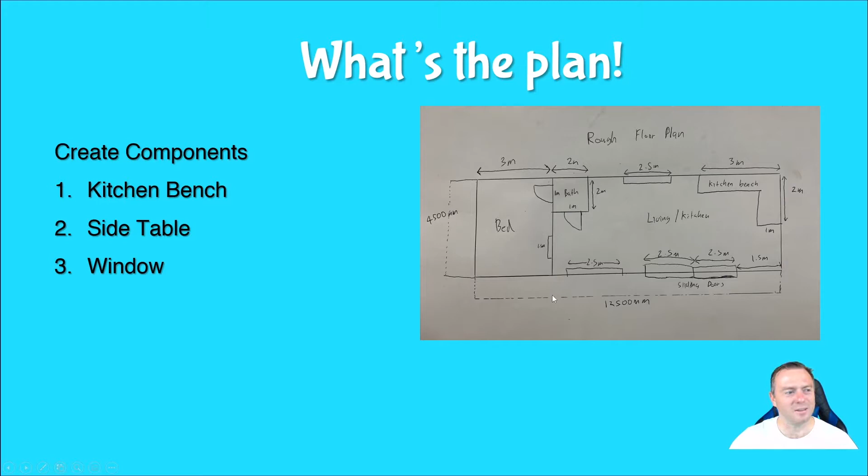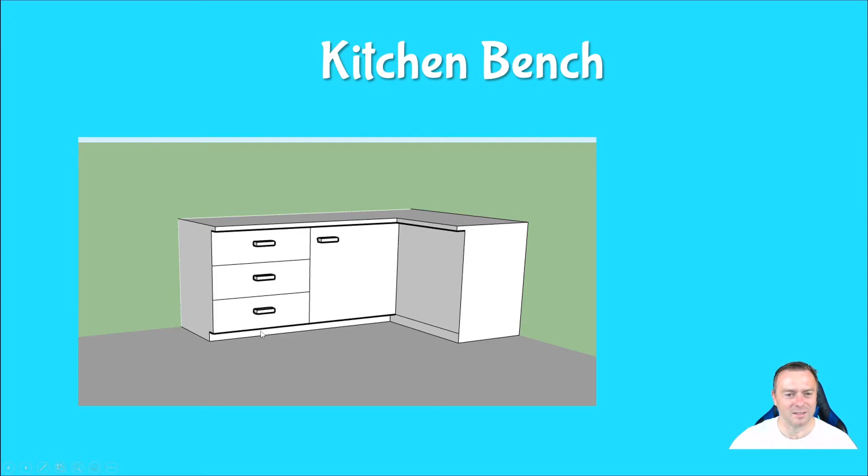Lastly, we have our side table, which should be able to fold in and out off the wall to save space. That will be just a simple rectangle extrusion tool. And lastly, we're going to build a window, a simple mesh window on the side here, using a push-pull trick, and then we're going to put a rectangle into it.

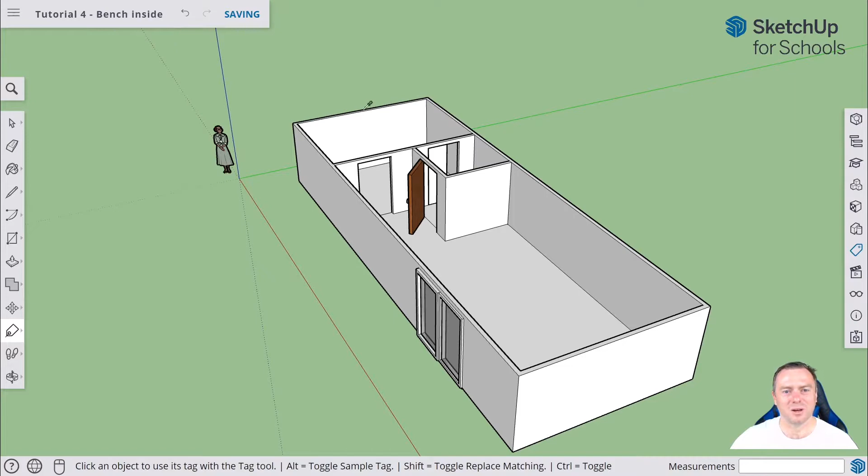So to begin, let's just jump into our SketchUp file. This is what we were up to last time. Notice that I've saved it as I've gone along the way. By clicking save at the top here, it will save it onto our Google Drive. I've just changed the name here up to tutorial number 4 so that you guys can follow along at home if you missed it.

So what we're going to do is zoom in here and build our kitchen bench first, 3 meters by 2 meters. We come here to our rectangle tool, click on that, and come to that very corner there. We come across here and it's meant to be 3 meters, so we're going to go 3,000, comma, and I'm going to make it 800. So that's going to be 3,000 by 800, and then I press enter.

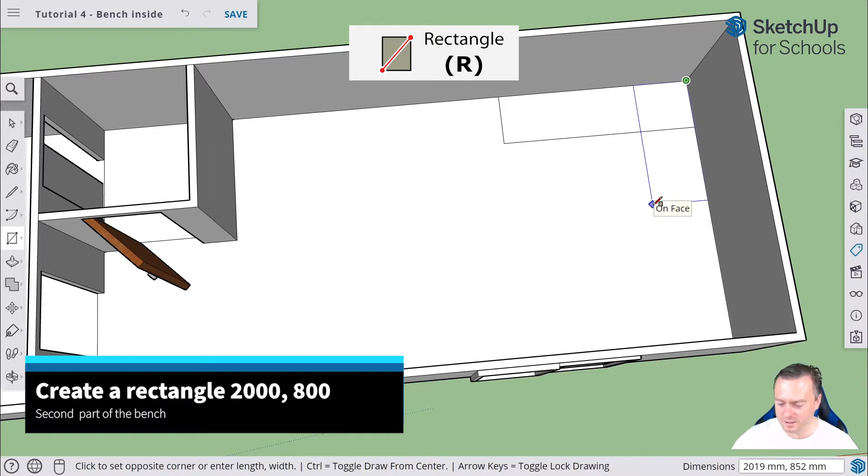I'm going to come across here again, same rectangle tool, but this time I'm going to make it a little bit smaller. So we're going to go 2,000, comma, 800. So now we have our 2 rectangles.

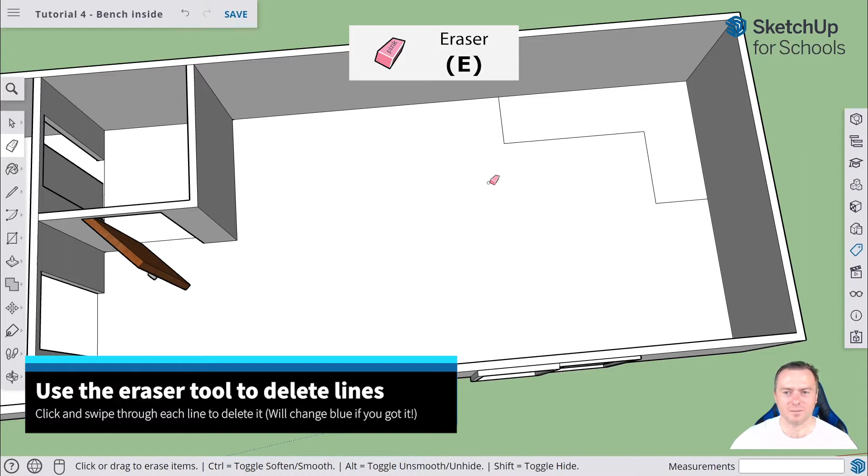Now if we push and pull this up, we'd have to do it 3 separate times, but it's all going to be the same height. So what we're going to do is actually use the eraser tool and get rid of these 2 lines here. The way we do it is we click here, swipe through and see how it's changed to blue, and let go. Then if I swipe down, click through there, it then lets go of that. Pretty cool, so now we have a little L shape for our kitchen in the corner.

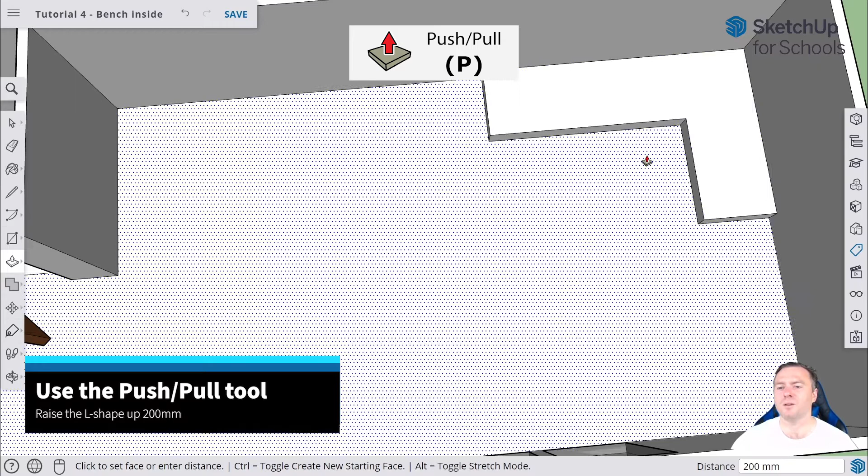We're then going to use the push pull tool. So we come down here, push pull, and bring that up. We're going to have a 10 centimeter gap down the bottom. To do that though, we need to have a top above it, so we're actually going to cheat a little here and go up 200 millimeters, and you'll see why we've done that later.

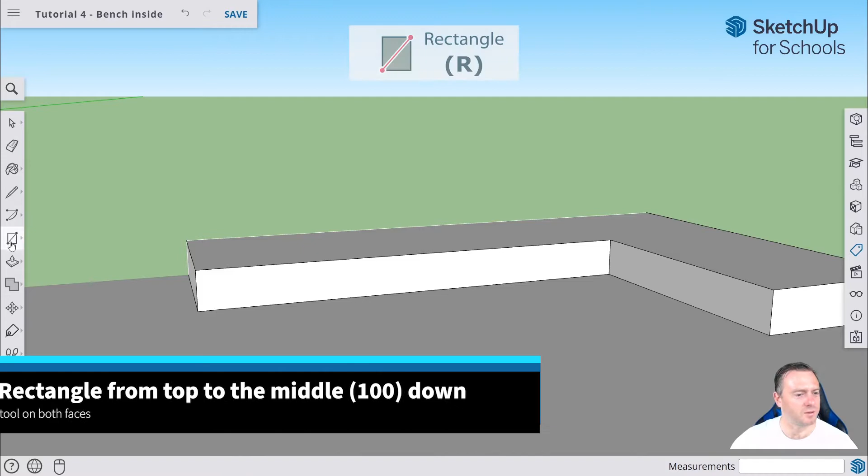So this is going to be a bit tricky with the walls to play around with this. Because we've been awesome and done the tags as we've gone, we can now hide the walls, hide the front door. Pretty cool. So now if we zoom in here using the hand tool, we can now build a little rectangle into this. So we're going to use the rectangle tool, click on the corner here, and what I'm going to do is go down to the midpoint and then straight across.

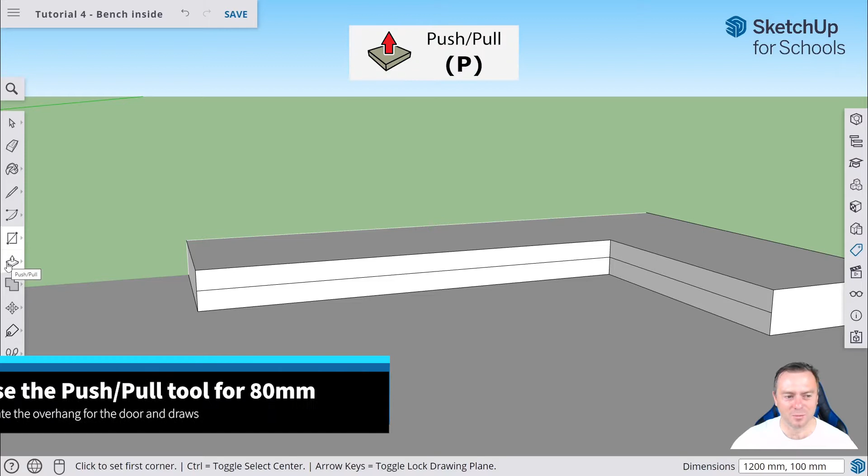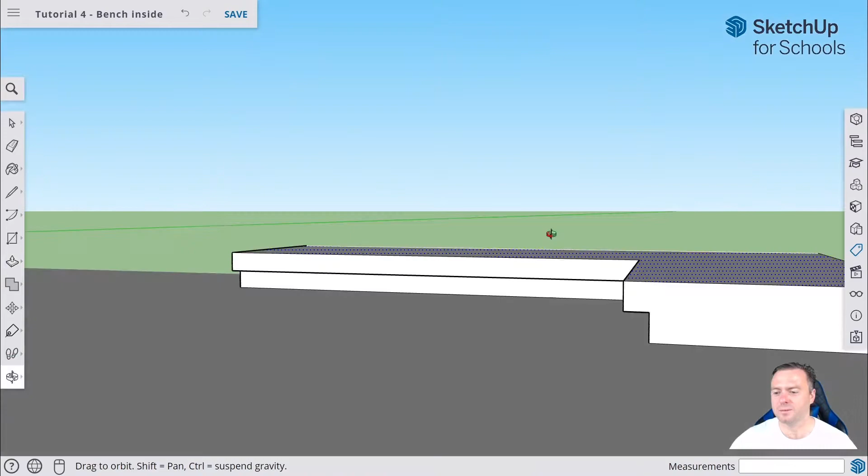And then I'm going to do exactly the same over here. Because it was in the middle between it, we now have the bottom under here. I'm going to make it have a bit of an overhang. So we go to the push pull tool and click on this guy, and let's go across, let's do 8 centimeters, so 80 mil. We've got a bit of overhang there for our benches, the doors and the drawers, and we've got 80 as well on this side. So now we have that little overhang, which looks pretty cool.

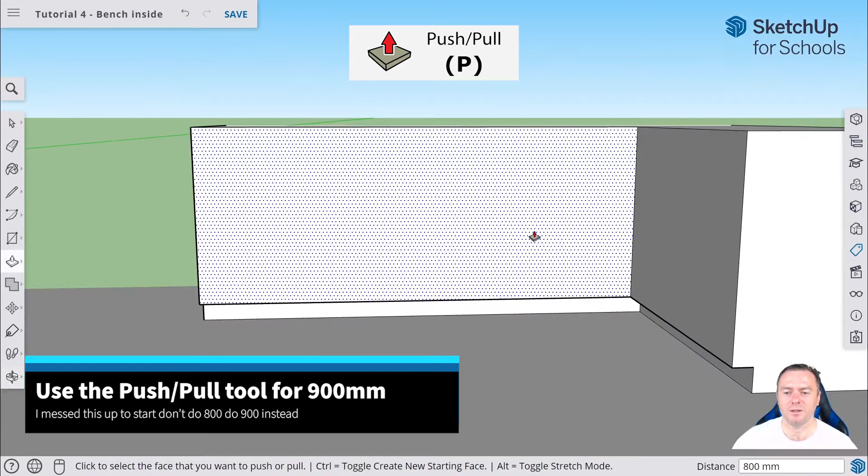We then need to raise this all up. Before we went up, how far did we go? We went up 10, so let's go up another 80. If we click on that and go up, we'll go 800 mil. So we now have our bench with the 10 centimeter there, we've got 800 up here. Actually, let's go up another 90. So undo, let's go up 900 mil instead. Now you'll see why I did that later.

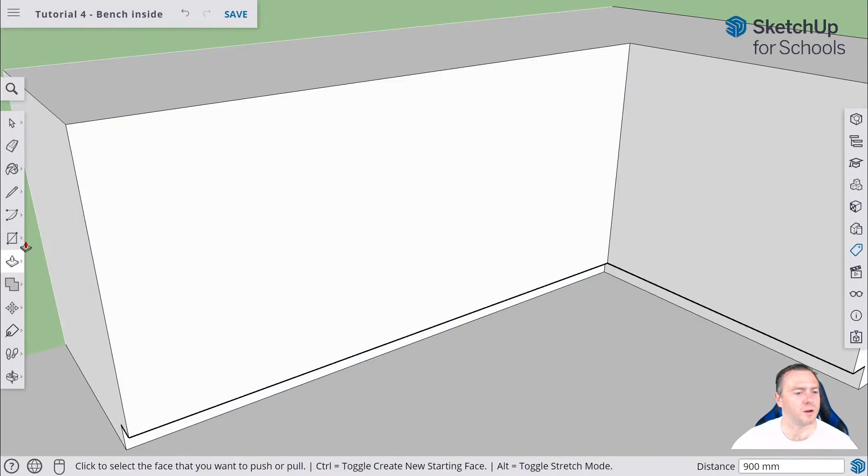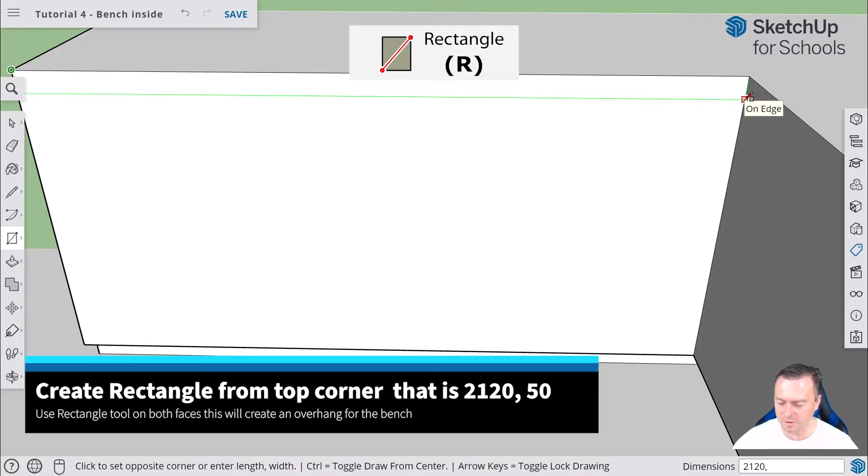So what's going to happen now is we're going to build a rectangle into the side of the door for the overhang here, and we want that to go across to there. So we go 2120, comma, and we want to go down, let's go 50 mil. Okay, and then we'll do the same over here.

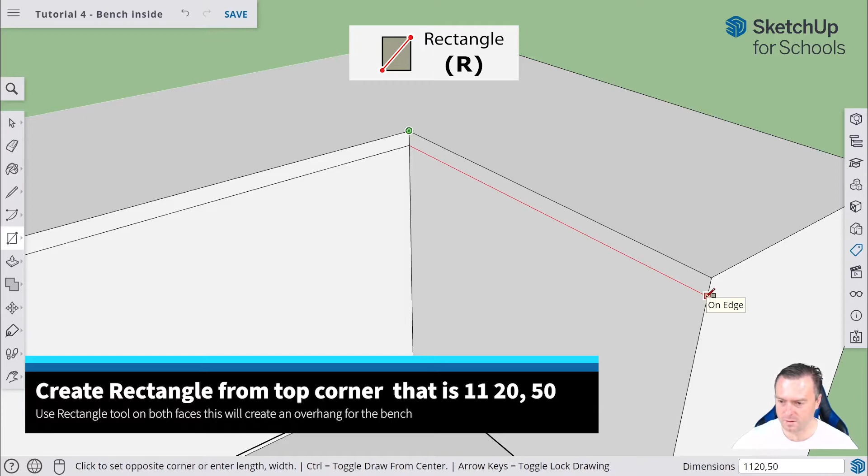So we use the hand tool, come across, zoom in, get the rectangle tool, click on that. This time we'll go 1120, 50. Cool, so that's just a little bit higher, that's why I hesitated before. So we've got that gap across the top of our bench.

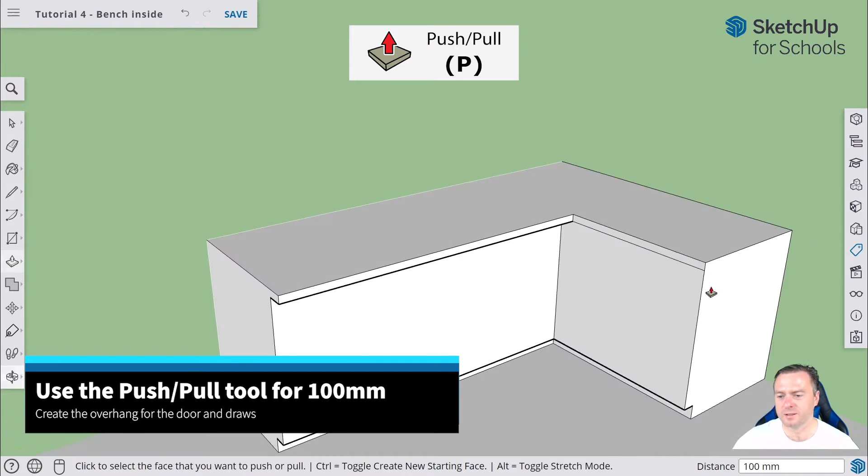We're then going to use exactly the same tool that we did before down the bottom. So we're going to use the push pull tool, click on that corner there, and this time let's come out 10 centimeters, so we'll go 100 mil. Then we'll do the same on this face, click on that guy, come out, and we'll go 100 mil. Cool, so we now have our bench top with the door and a little bit of overhang there.

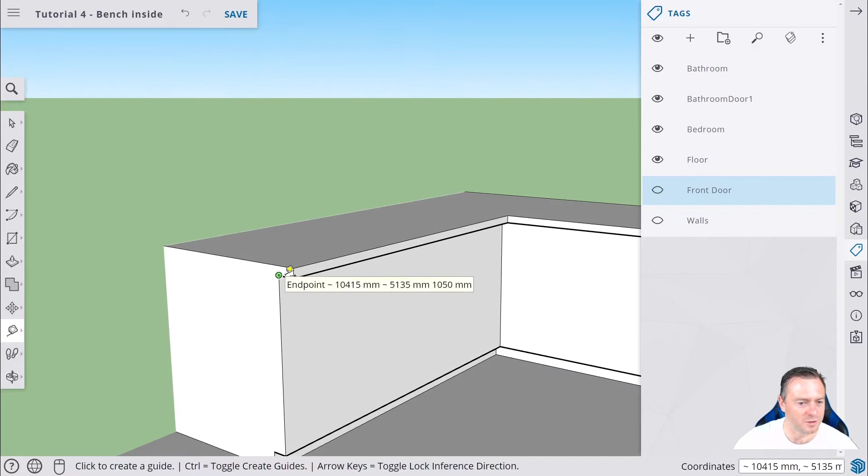So we're going to actually build some drawers now, just to make this a little bit more detailed. To do that, let's measure how long this side is, so then we're going to put 3 drawers down here. So we go from there down to there, it's 950, so we need to go 950 down. To do that, let's get our calculator out, and we'll go 950 divided by 3, so 316 roughly. Okay, so we want to go 316 up each one of these.

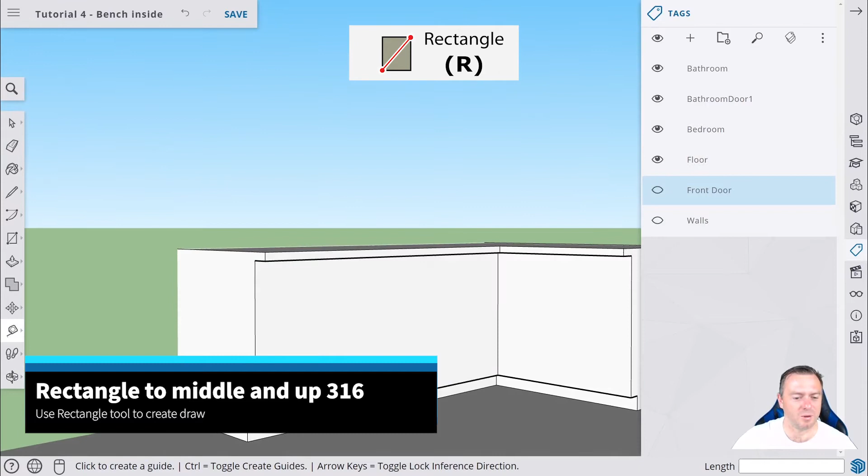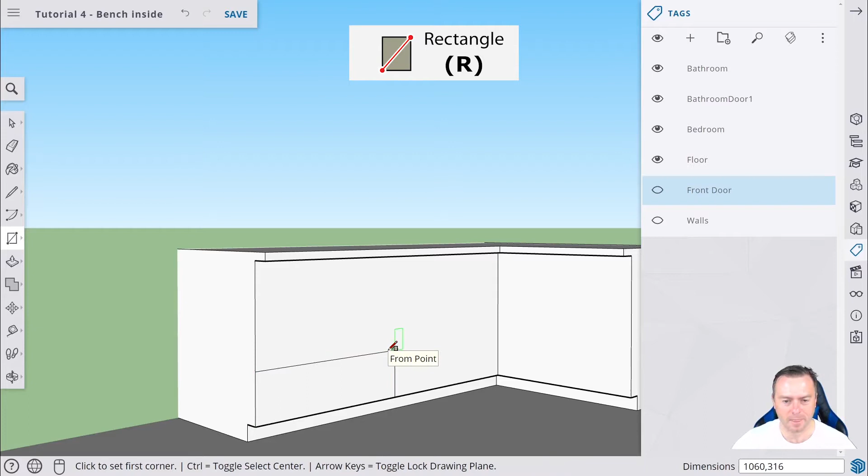Now if you're doing this, you might want to be a bit more accurate so there's no miscalculations, but just doing this real rough and quick so we can get our head around how to do this. So we're going to go from there, across the middle and up, and we've worked out that's 1060 and 316. So we'll go 1060, 316, so there's our first drawer. Then we'll go again for the next one, so 1060 again, 316. And the last one, I'm just going to use the pen tool.

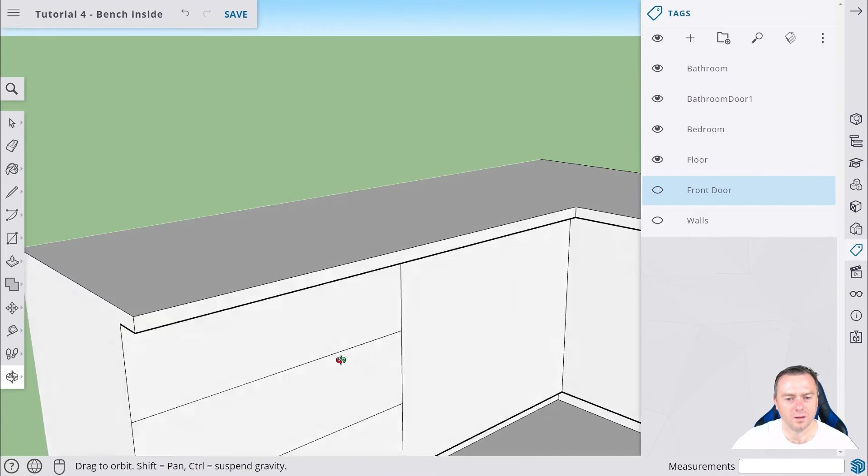So we click on the pen tool, and then we zoom in, and whoop, that went to the midpoint. Sorry, so we'll go there and then just straight up. Cool, so sorry, I meant the midpoint of that one, not the midpoint of the back here. Great, so we have our drawers and we have our door.

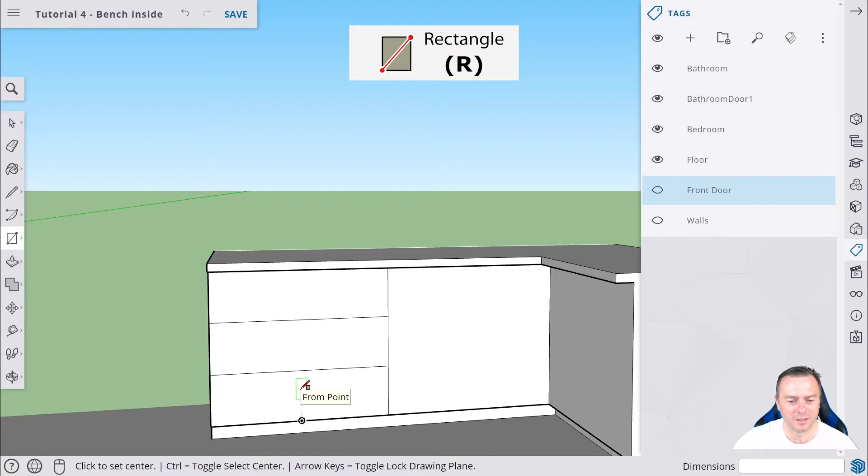Now to make this a bit more obvious, let's actually put some handles in here. So we'll go for the rectangle tool, find the middle point, and see how at the moment it starts from the corner. What we actually want to do is, if we press Control, it actually makes the rectangle start from the center. So if I press like that and drag it, it goes out that way, right, but if I press Control, see how it actually starts from the middle and goes out.

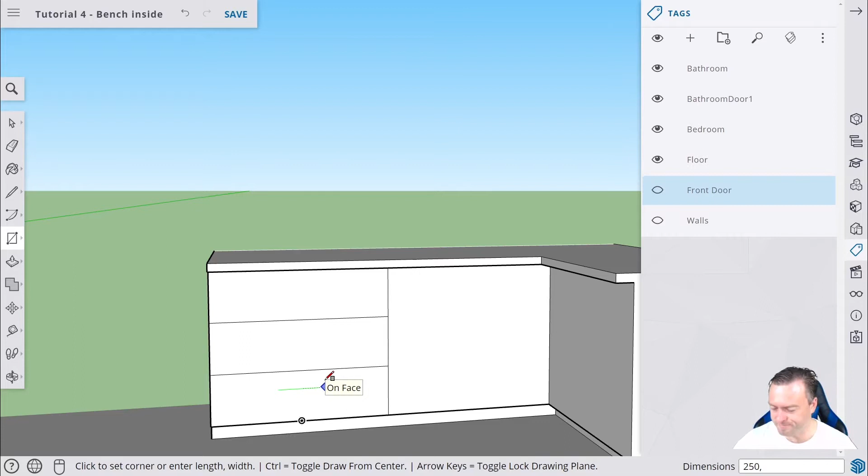So we want this to probably go, what would look good? It's probably a bit too big. Let's go probably 300, oh no, 250. We'll go 250 and we'll make that 40 wide. Cool, so we have our drawer built, and then we have our little fake handle. Now to make this 3-dimensional, we just use the push pull tool, bring this out, and let's bring this out 50 mil. Okay, so now we've got a bit of a handle there.

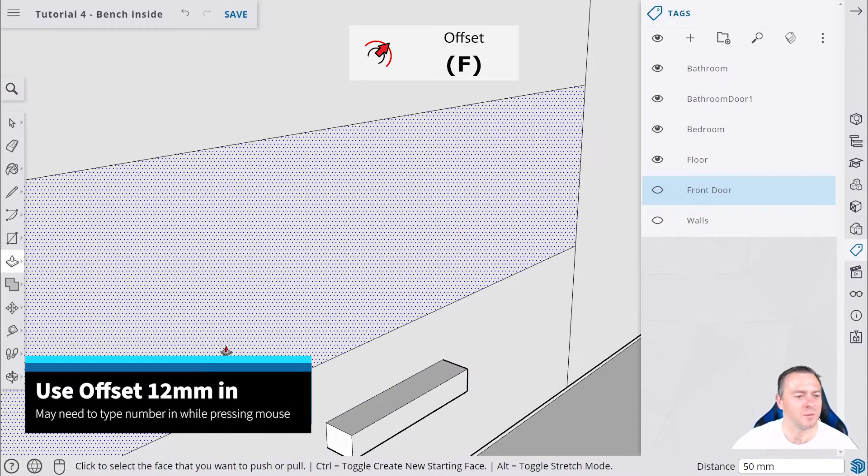And so that our hand can actually go into it, we're going to use the offset tool. So we go down here, click on the offset tool, click on that edge like so, and let's go in, let's go 12 mil in. Cool, and then we're going to use the push pull tool again. Let's deselect that drawer above it and we'll select that one. Push pull, put the arrow in the middle there.

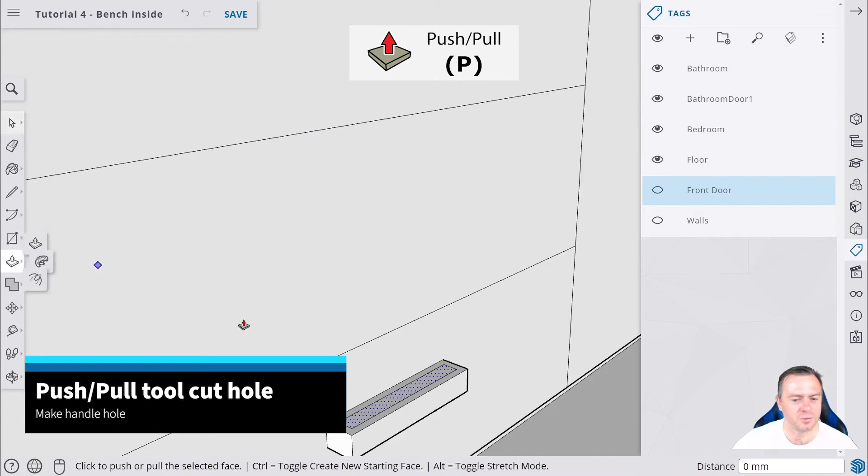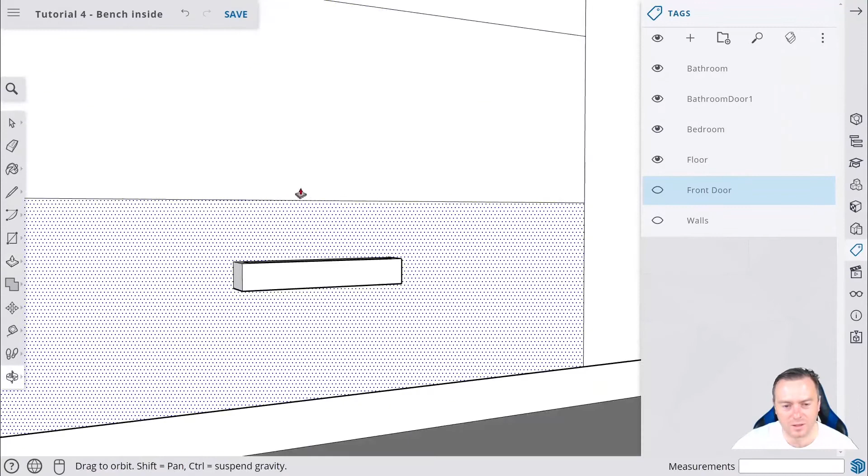We're going to go down and see if that worked. No... oh, has it? Oh yeah, it did. Cool, just so you can see it again. Sometimes it might do that. All you want to do is go on face and then it will basically cut through instead of drawing the rectangle all the way through.

Great, so we now have our handle. Let's group that. Select all that there, right click on it, and go make group. Now we could redo all that again, but because we've done it once, the whole beauty of this is we just copy and paste it.

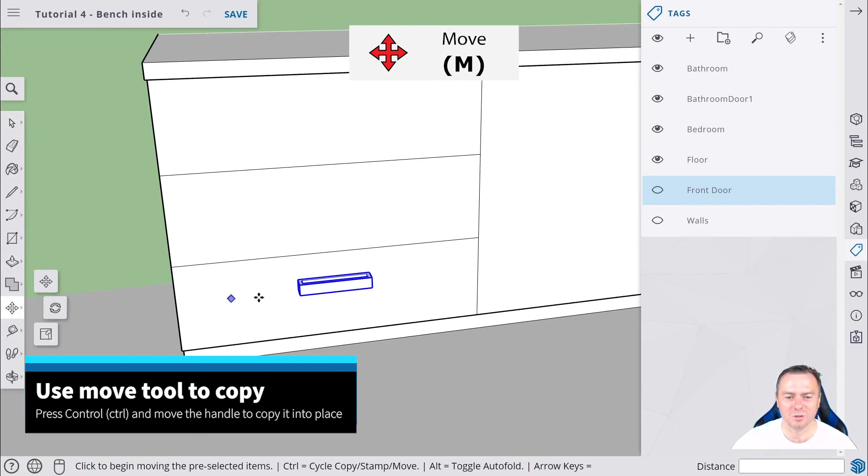So what we're going to do is use the move tool. We click on this guy, go up, and we know exactly how high up we need to go: 316. We press the Control key first, which allows us to duplicate with the move tool. Then we type 316 and enter. Done, handle. Then we go again: up, press Control, 316, enter. Oop, that didn't work.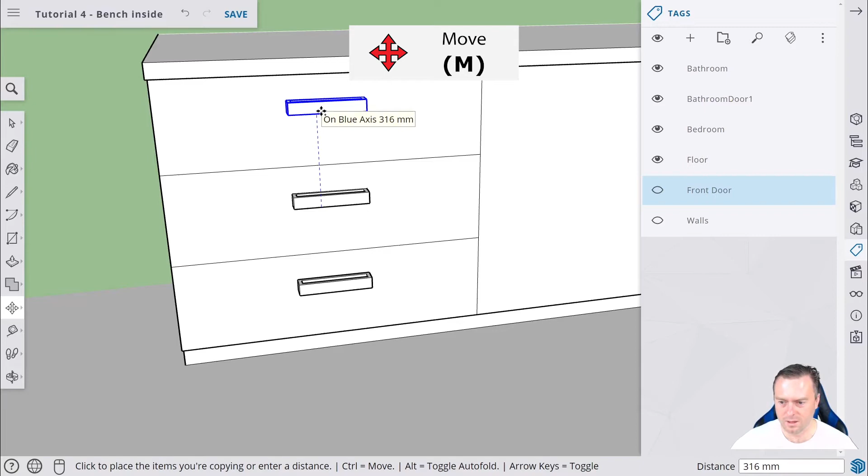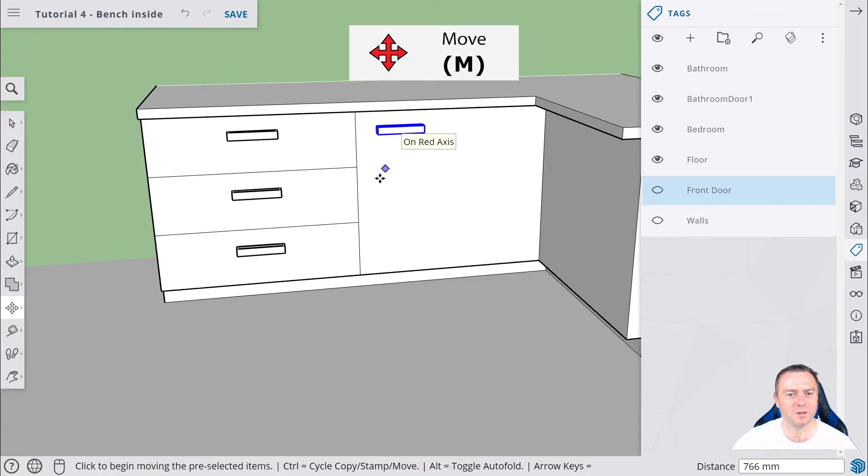We then probably want to put a handle over here on the hinge of the door. So to fix that, again using the move tool, click on here, press Control once, and I've made it probably about 766, which looks pretty reasonable. Click, and then done. There's our table, all done and dusted. How cool is that? So that's our bench now.

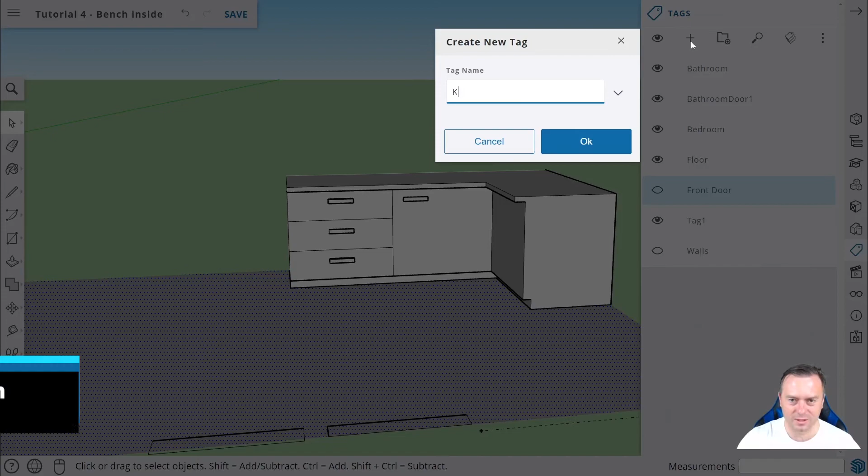Now, because we've built this component, what we can do is save that. So we're going to select it all, right click on it, and go make group. We're then going to make a tag for it, so we'll go up here and call this kitchen bench. Then okay, and click on kitchen bench.

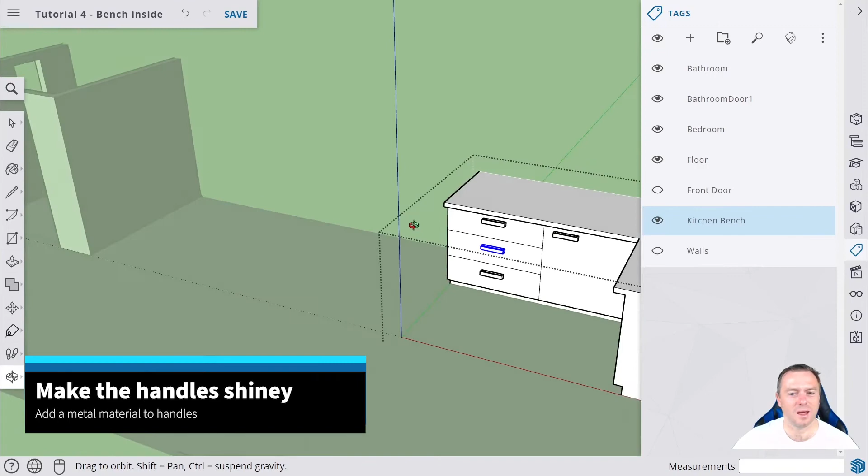The other thing, if you want to get a bit fancy with the handles over here, is if we double click on the group, it actually deselects things, so then we can select things inside of the group. You'll see everything turn green, which means we're just focusing on inside this group. We can then double click on this. So once I'm in this green mode, I can click on all the objects as if we were before. And the cool part is we go over here to materials and put on some metal.

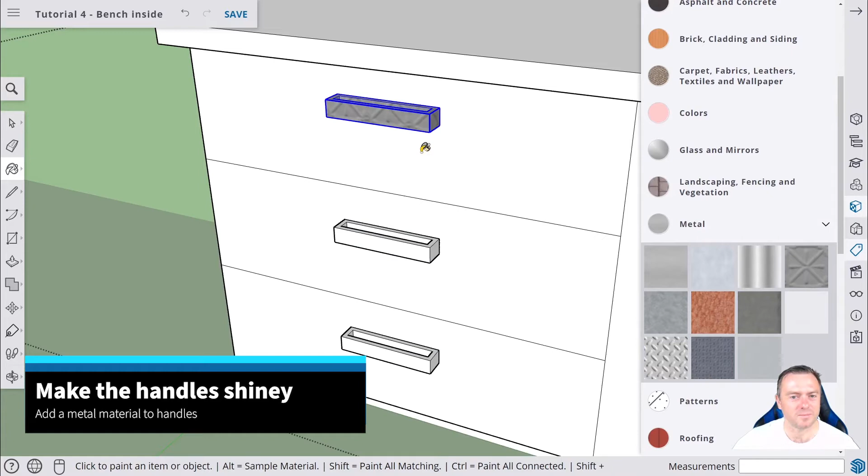So if we go down here to metal, let's see what this pattern does. That's pretty cool, so now we can put that on all the handles. Oop, if I press Shift Z that'll allow me to zoom out - sorry, went in a bit too close. We use the paint bucket tool. So there's our handles done and dusted.

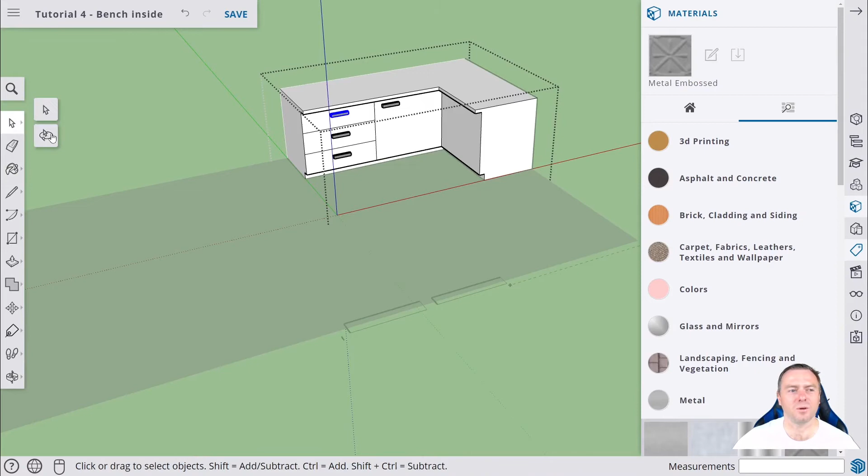Now to get out of that group mode, we just use the selection tool and double click anywhere outside of it, and that will go back to normal. So then that will be considered an object by itself that you can't really get into unless you double click on it again.

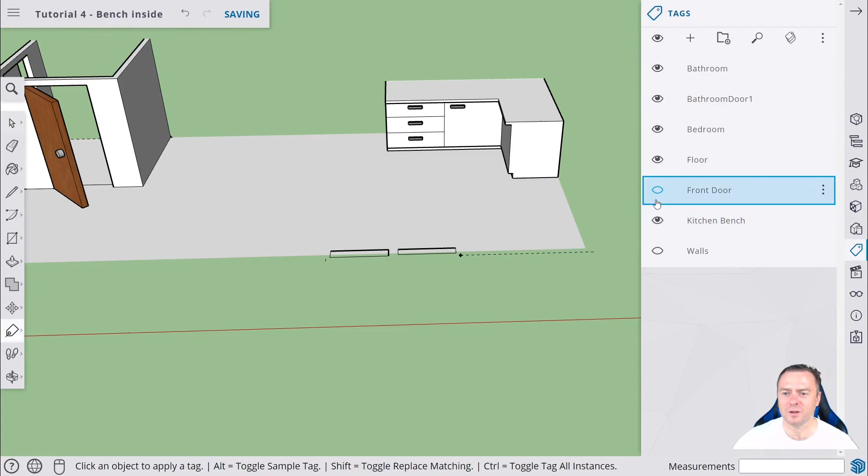Cool, so now let's build the side table. We're going to bring up the tags, hide the materials so we don't have too much confusion, put the front door back in, and put the walls in to see where we're up to. So we want to build the side table over here, using the hand tool coming across.

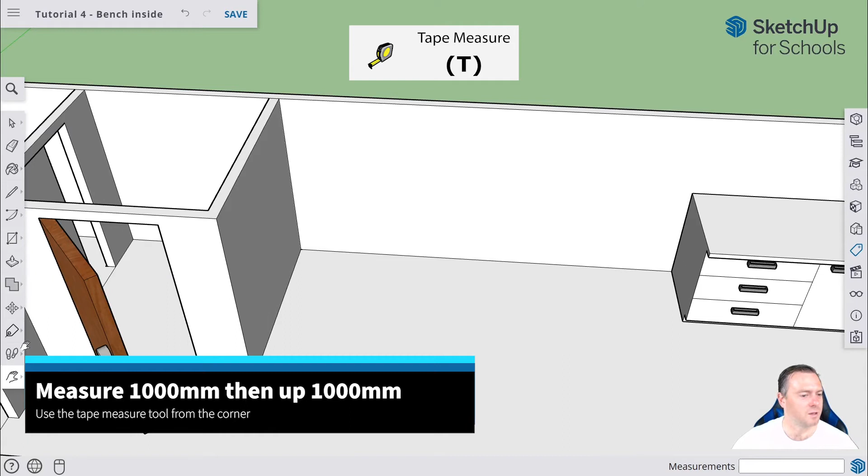What we're going to do is measure in - let's go a meter in, and then a meter up and see what happens. So we use the tape measure tool over here. Click tape measure, hide the tags again, click on the corner here, and let's go over a meter - 1,000 millimeters. So that's where our dot is. We then want to go up - let's go up a meter as well, so 1,000 millimeters.

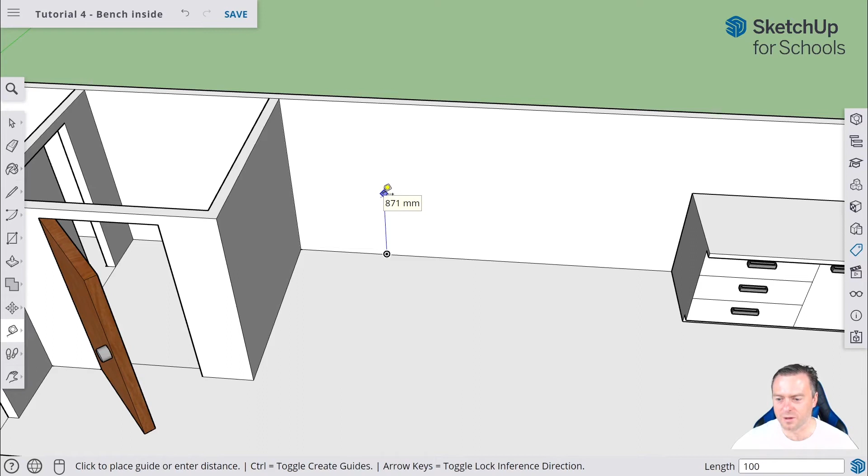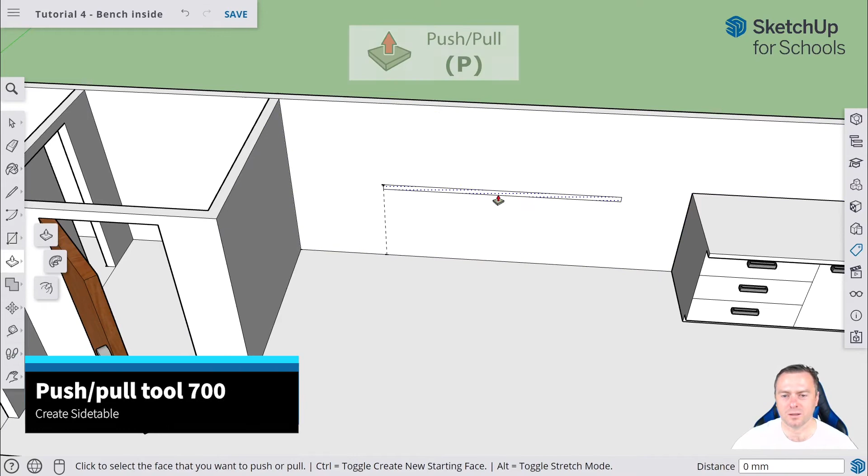We're then going to go to the rectangle tool, click on the corner, and make it go down like that. We want to make the table - let's go 2,500, comma, and let's make it 600 mil. Cool, and then we want to use the push pull tool, select the little dotted lines in the middle here, and let's bring that out 700 mil.

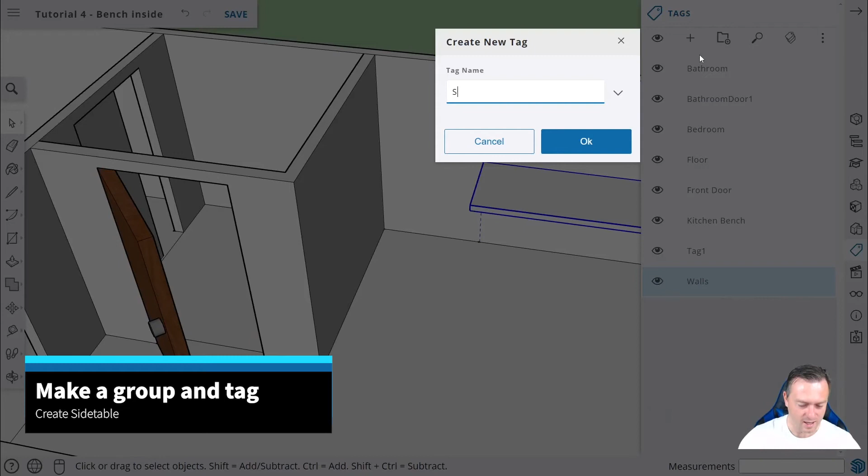Side table done. Now because we've built that component, let's save it. So let's select it all there, right click, and then we'll make a group. And then we'll build our own tag.

We're then going to click on the side table, then click on that, so now we should be able to hide that little side table. It looks like I've hid the measurements as well. Please don't delete your measurements ever, because that's useful as a teacher to see how you actually thought that through and built it.

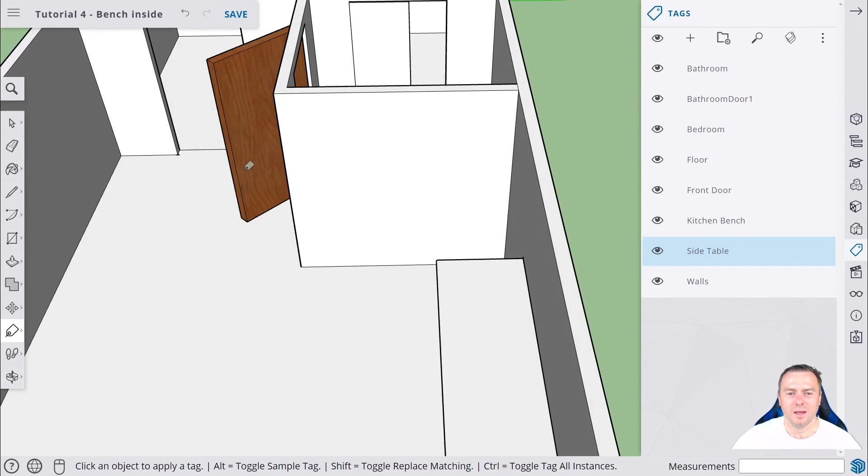Excellent. So the last bit then, we need to build a window. So we want to go across over here into the corner. So we have a pesky door in the way, so we probably want to hide that bathroom, and we also want to hide the door. So we click on those, and now we can see the corner over here.

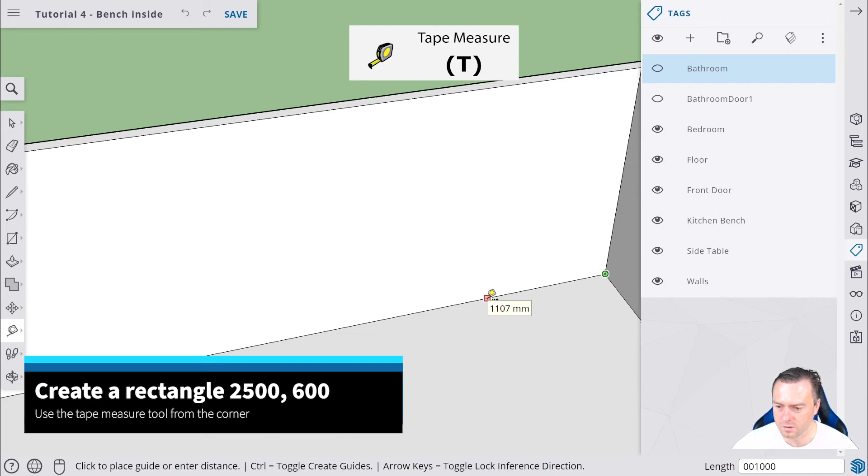So what we're going to do is we're going to measure in again from the corner, and we go across here along the axes, and we'll go 1,000. And we've got that point there. Cool, that's better. Now we've got the actual measurement. So then we'll go 800 up.

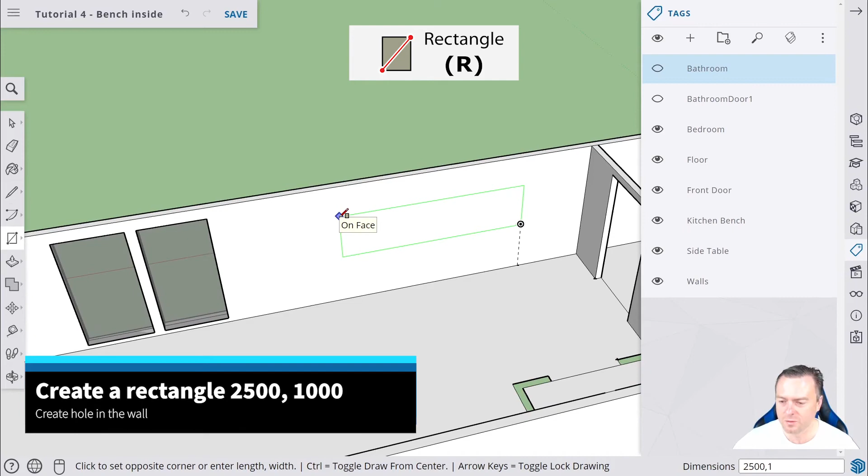Cool. Now we're going to draw a rectangle. So click on the rectangle tool, click on that corner. We'll go across, and our measurement was 2.5 meters, so we'll go 2,500, comma, 1,000. So now we have our hole in the wall. Well, not yet, we've got to push pull through that.

So we use the push pull tool, click on the center there, push through on face, click. And now we've got a big breeze coming into our house because we've got an empty window. So to fix that, we need to put some glass in there, same process as when we did the sliding doors.

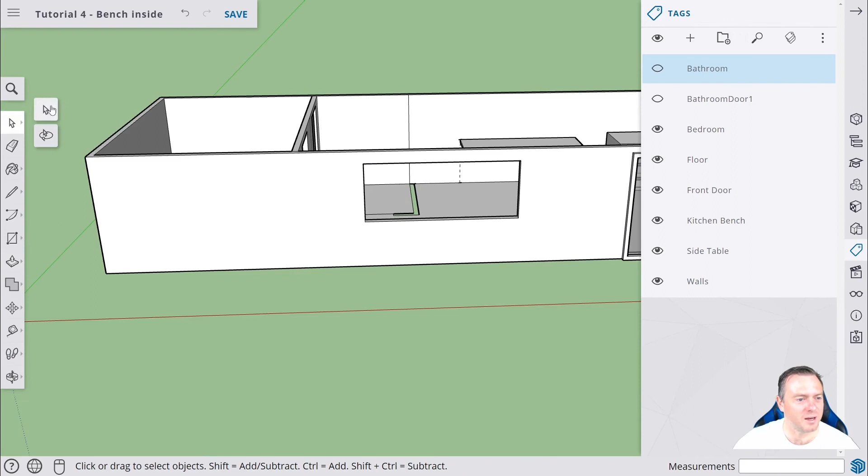So we're going to draw a rectangle outside here. So we click there, measure that out, I'm going to go 2,500, comma, 100. We're then going to use the push pull tool, and we want that up to 1,000.

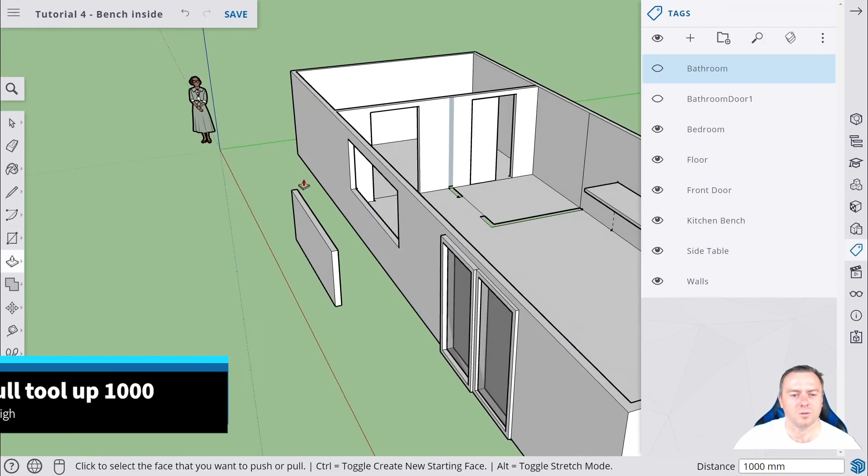Cool. So we now have our pane of glass. To fix that, we then want to select it, right click, make a group.

We then let's put a material onto it. So we go glass and mirrors, and let's put the mesh one down here. So now we have this transparent sort of fly screen mesh.

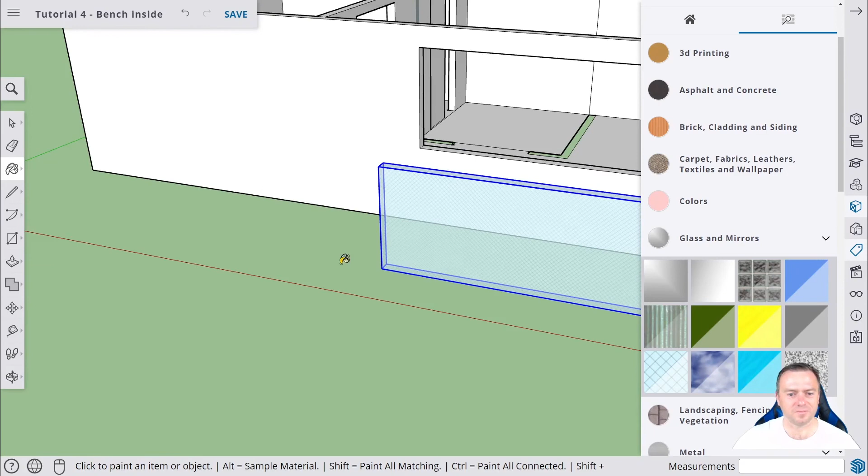And then the last bit that we need to do is then move this back up. So we're going to click on the move tool, click on the corner over here, and then move it into that endpoint.

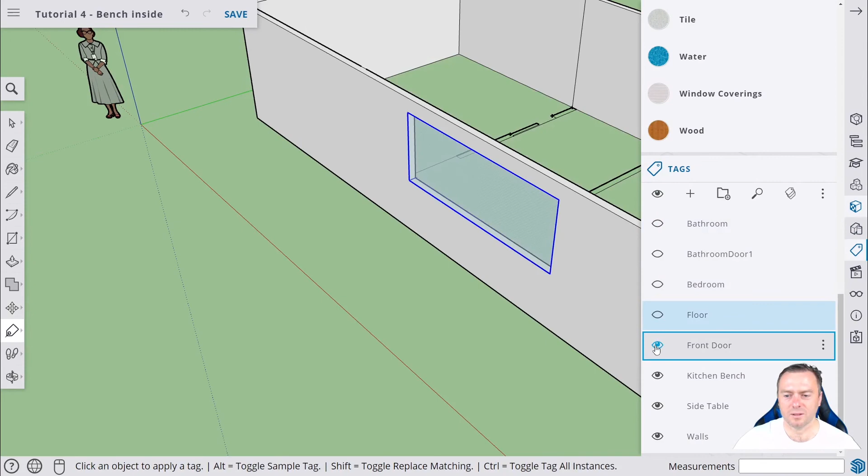Awesome, done and dusted. Last bit was we probably want to tag this. So let's just hide everything else that's currently here, and we're left with our floating window. Now that's the cool bit about tagging as you go.

You're allowed to then come in and you can just literally shift, it's not even shift, you just click down and select all that. So now that's selected everything that's inside there.

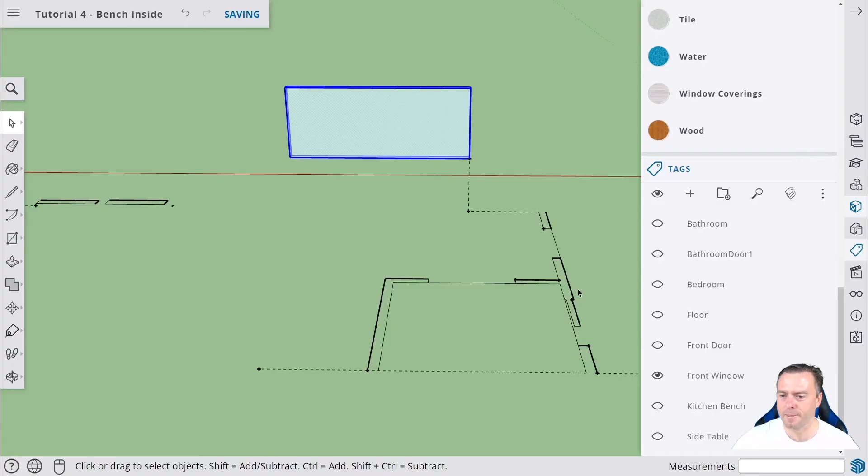I then go up here, I'll go here, and we'll call this the front window. And then okay. And then I'll come here to front window, click on the tag, get the tag out here onto the window, and we apply it to the front window. So now we can make that super invisible.

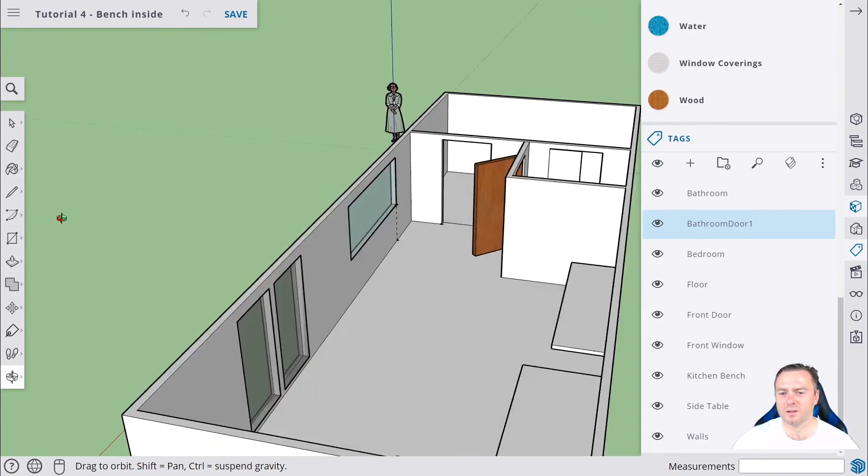Pretty cool. Awesome. So if we want to bring back our house and see everything that we've built today, we can just literally click that eye tag at the top here. And there is everything, how cool is that? So we've built the window, we've built the side table, and then we've got our little kitchen bench over here.

Great. So the next step that we will do is we're going to build a bit more of a detailed cupboard for the bedroom, okay, so a little dressing table.

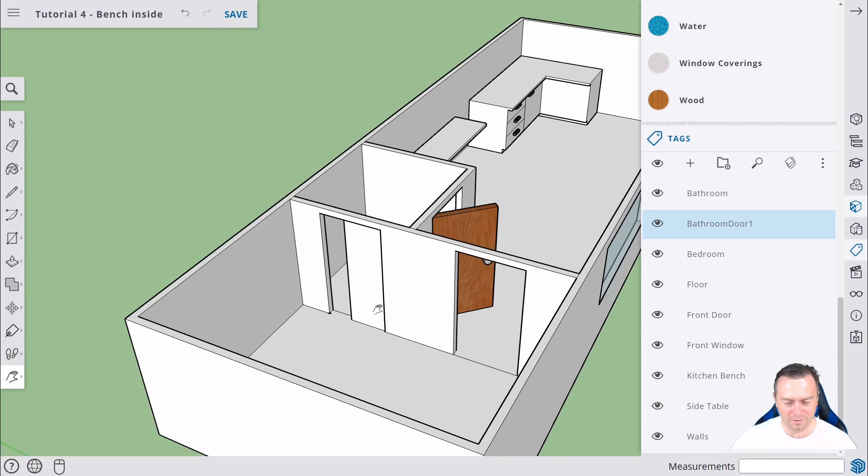And yeah, hopefully you've enjoyed and you've learned something about components today. My hint to you, if you're building this for an assignment, your teacher will appreciate it a lot, you doing that by yourself. So instead of just going on the internet and finding components, by drawing it, you will get a better mark because your teacher will see the level of detail and craftsmanship that you've put into this.